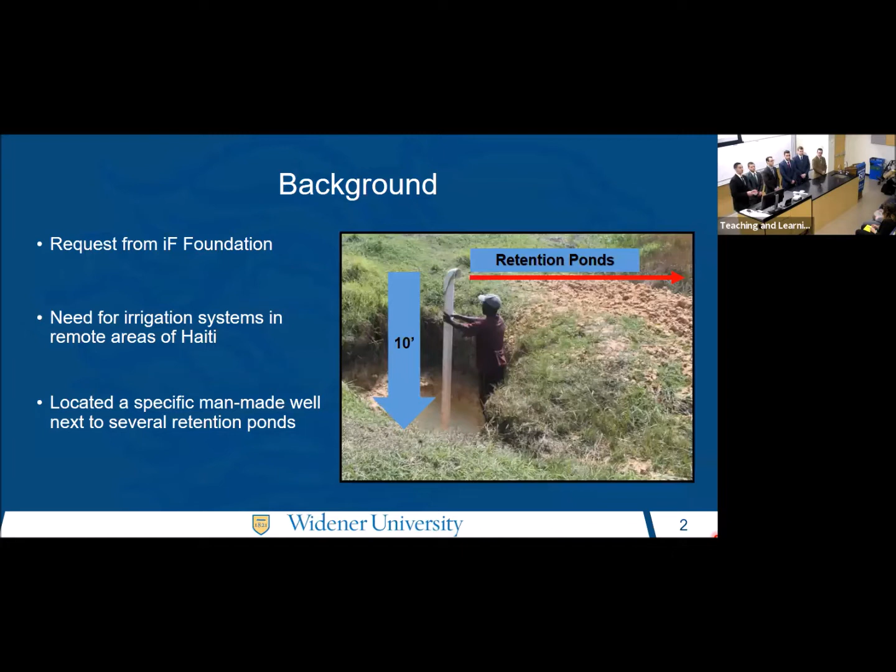They also located a specific man-made well, which can be seen in the picture to your right, where the water level is 10 feet below ground level and located next to several retention ponds. The Foundation is highly considering implementing a wind-driven pumping system to move the water from the well to these retention ponds, so it's more easily utilized by these Haiti farmers.

The main goal of our project is to perform a feasibility study of a wind-powered irrigation system with the scope of designing, manufacturing, and testing a scaled-down prototype. In doing so, there are certain design criteria involved with the full-scale design.

Our target flow rate is at least 3 gallons per minute, which is recommended to us by the Foundation. Also, a cut-in speed of less than 4.5 miles per hour. Cut-in speed just refers to the speed necessary to start spinning the blades.

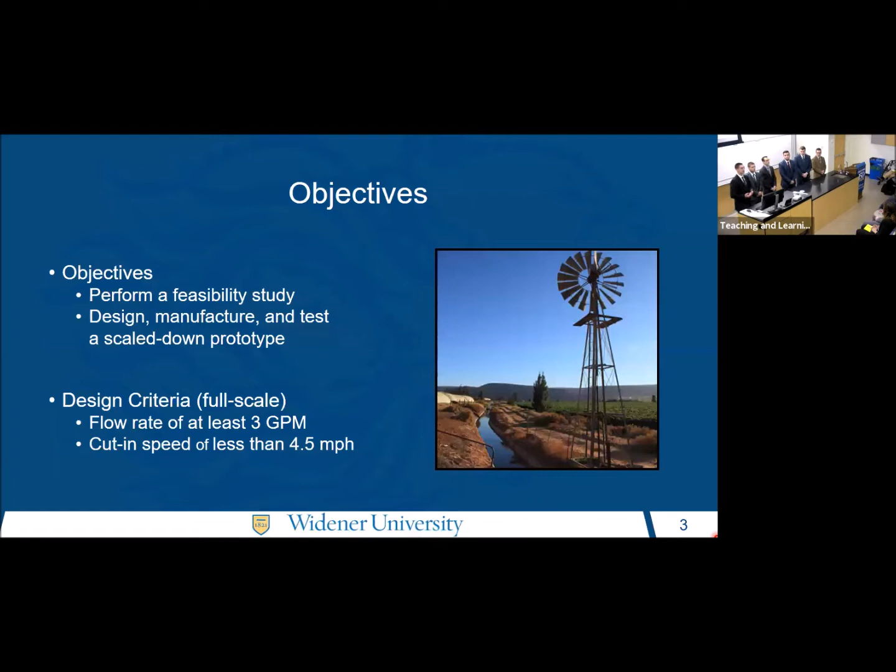There are also several design constraints involved. The main constraint being the very low wind speeds in the area of only 7 to 9 miles per hour. Another constraint includes a blade diameter not exceeding 15 feet. We also would like to keep our costs low and make it easy to manufacture so it's more affordable and easier to implement for the people in Haiti.

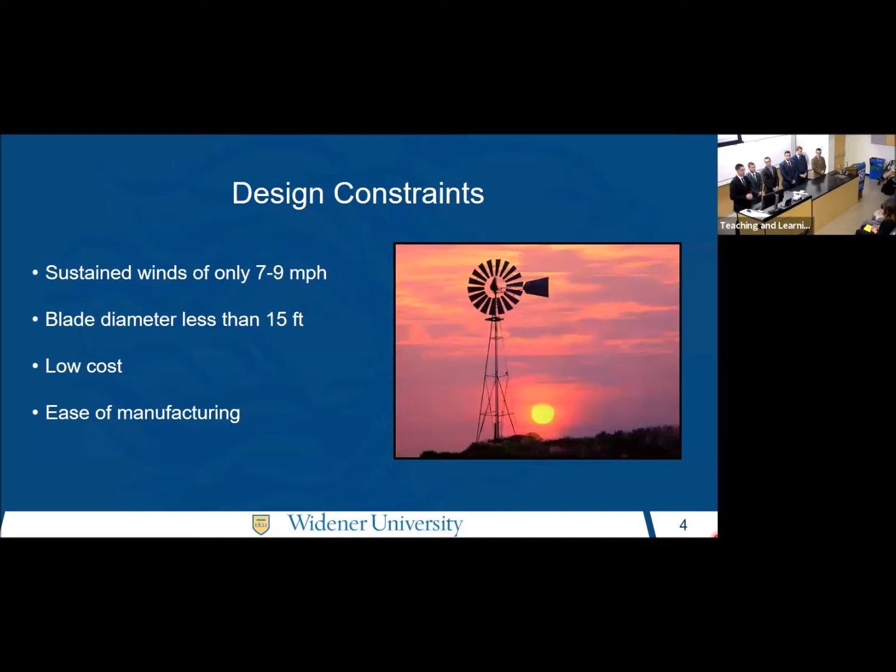Our approach in the beginning of the year was to divide this project into 4 main components that are interconnected, meaning that if a modification is made to one of these components, it will therefore affect the other components as well. The 4 components we will discuss next include the turbine blades, a pumping system, transmission system, and the foundation and structure. Next, I'll hand it over to Justin to explain the blade portion of our project.

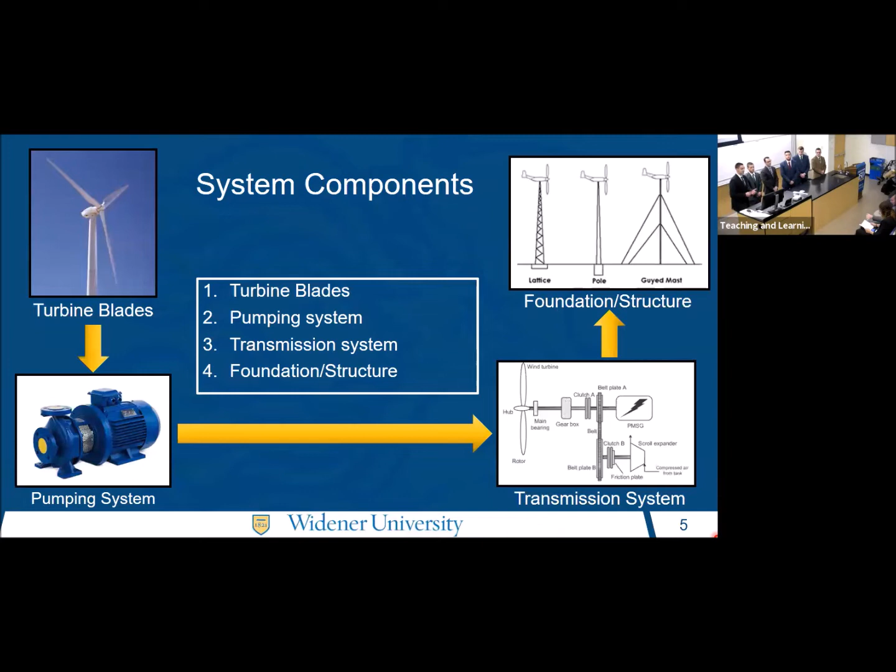Before selecting a wind turbine, it's important to know how much power is actually being produced from wind. In the top left corner here, wind power equals 1/2 times the density of the wind times the wind speed, times the area that the wind is occupying, or in this case, the area of our turbine. Notice that wind speed is cubed, so it has a dominating effect in the equation.

Because of this, it's important that we select a wind turbine that is as efficient as possible in harvesting available wind power into mechanical power. This metric is known as power coefficient, or CP for short.

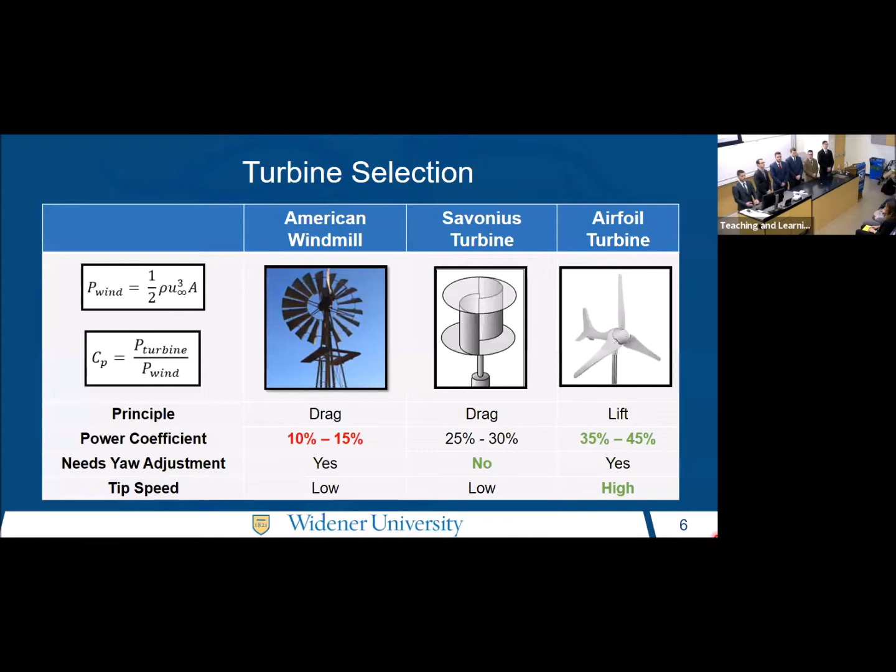The 3 wind turbine models you see here are the most common ones on the market today, with the American windmill often being used for irrigation purposes, but it has relatively low power coefficients due to drag-based design. The airfoil turbine, on the other hand, is a lift-based horizontal axis design that has relatively high power coefficient, higher than the other ones that you see. For this reason, we chose to go with the airfoil turbine.

For scaling down our model, we chose to go with a 3-to-1 scaling, and this meant that we'd be making a 5-foot diameter turbine. Dynamically, for our results to be meaningful, there are 2 non-dimensional parameters that need to remain in our full scale and our scaled down model.

First is Reynolds number, which characterizes the flow of the moving fluid. Second is tip speed ratio, which compares blade tip speed to the wind speed actually propelling the turbine. Keeping these quantities consistent, we're able to find what our required wind speed is for our prototype, as well as how fast our prototype is spinning.

We found that our prototype would need 3 times the full-scale wind speed. We found that our prototype would be operating 9 times faster than our full-scale.

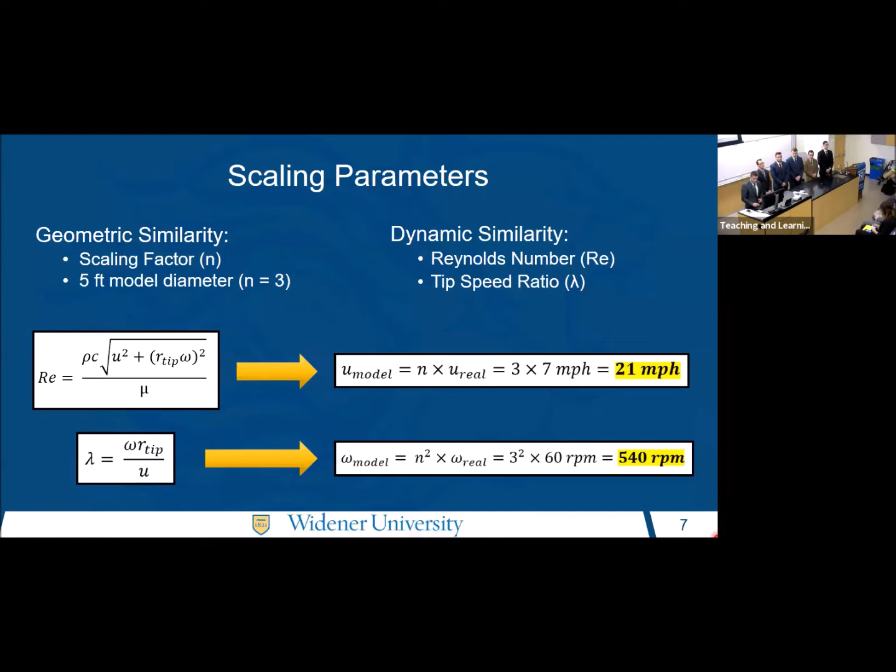For our blades, we designed and optimized our blades using iterative MATLAB code based on the blade element momentum theory. In this method, we split our blades up into 20 equal length segments, where we calculated the force on each segment using relative wind speeds and the lift and drag coefficients we were observing.

After integrating over the blade radius, we could then find things such as power coefficient, total power, and other important variables. This graph in the bottom right shows our twist angles for each blade segment along the blade that was calculated in order to ensure an optimal angle of attack of 6 degrees. It's also helpful in manufacturing the curvature of our blades.

Overall, we were able to optimize our design for our low wind speeds by selecting a NACA 0012 airfoil that has the listed parameters here.

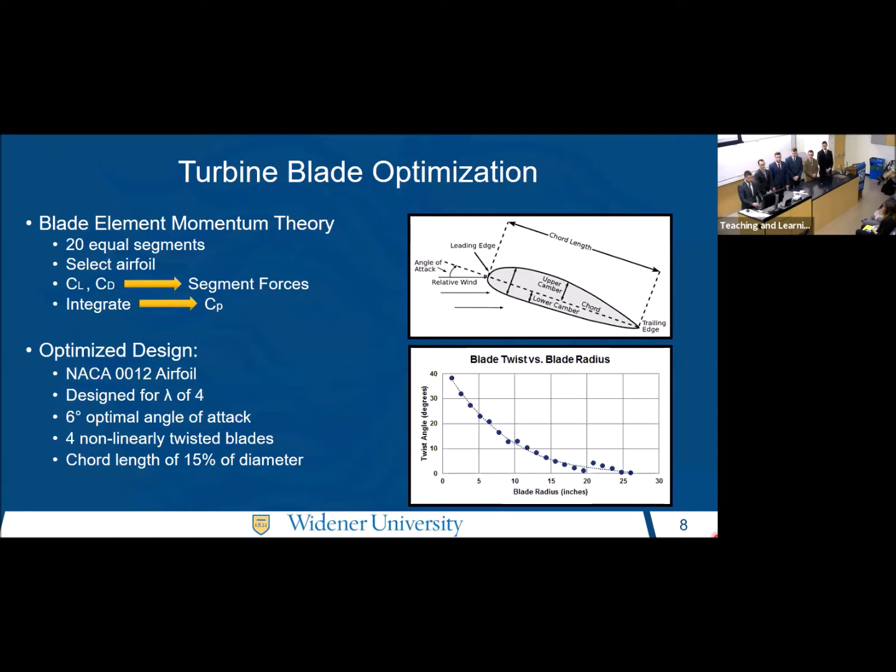For manufacturing, we 3D printed our blades in spans using PLA plastic. When making the solid model, we had a rectangular hollow cross-section that went all the way through the blades, coupled with two holes through the base of each span. This allowed us to slide each span onto a bar stock.

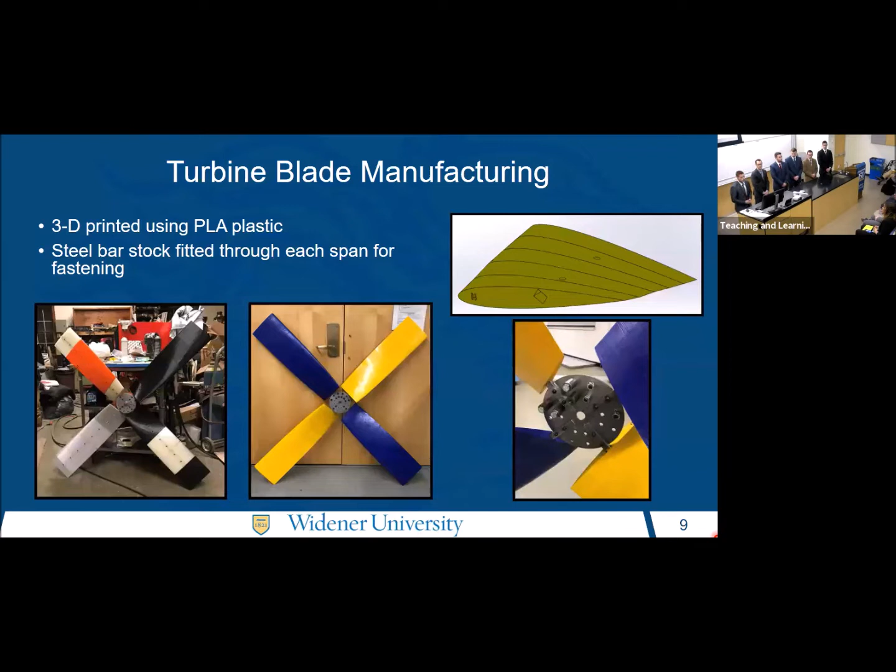Now I'll hand it off to Jesse, and he'll tell you a little about the pumping system.

Thank you, Justin. In considering design for the pumping system, there were constraints we needed to follow. First was an ease of integration between the pump and the turbine itself. We wanted something simple that runs at low shaft speeds and requires little maintenance. We needed to be able to operate with low amounts of applied startup torque, and most importantly, be cost efficient.

Looking at the Archimedes screw pump, these offer good flow and operate well at low shaft speeds, but due to its angle and size, integrating it into our system would prove difficult, and implementing it into the well in Haiti would be even harder.

Next, we looked at the progressive cavity pump. These use complex geometry to move fluid through moving chambers within the pump. They operate well at low shaft speeds and are able to overcome large amounts of head pressure, yet they are extremely expensive, with prices that can exceed $20,000.

So finally, we looked at the single acting piston pump at the bottom right. These are common for windmill applications because they can convert the rotational motion of a crankshaft into the translational motion of a piston. On the upstroke, fluid is sucked into the chamber, and on the downstroke, it is discharged. Not only are these pumps simple, but they are cost efficient.

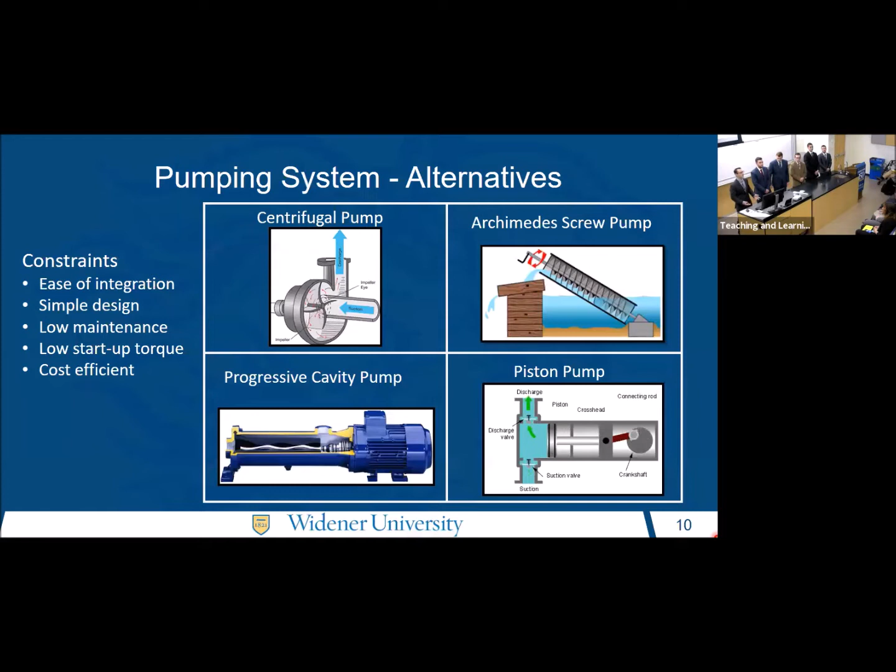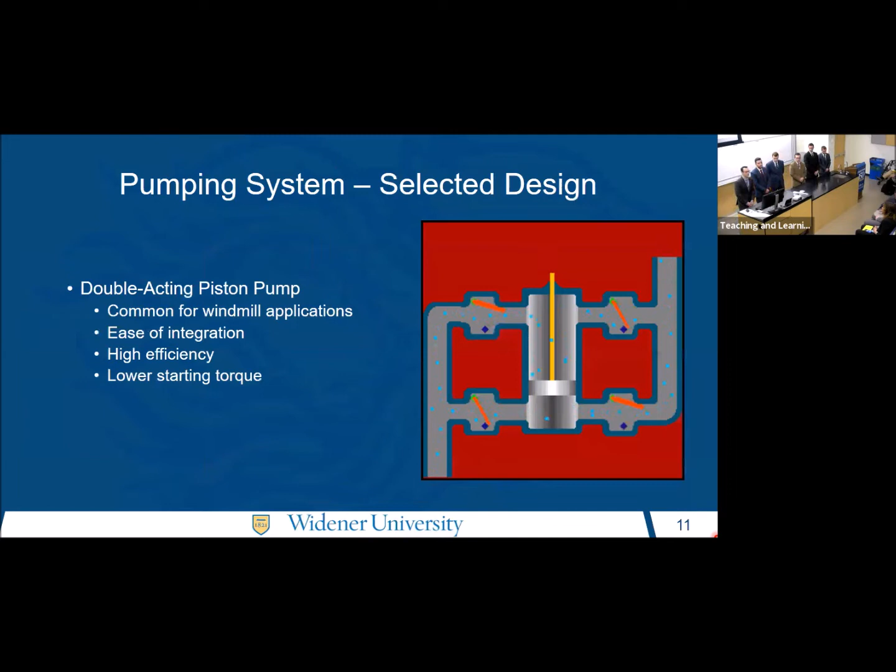We decided to go with the piston pump by making a modification to it. Instead of a single acting piston pump, we wanted to use a double acting piston pump. Same concept, except it includes 4 check valves, a suction chamber, and a discharge chamber. This discharges fluid on both the upstroke and downstroke of the piston, makes the system more efficient, and lowers the required starting torque by almost half.

The way we built this was by buying a simple hand bilge pump from Home Depot, 1.5 inch PVC, and several fittings, along with 4 check valves, and we assembled and glued all the parts together to get the pump you see on the right. Once we had our pump finished, we needed a way to integrate that to our turbine through a transmission system, which Curtis is now going to tell you about.

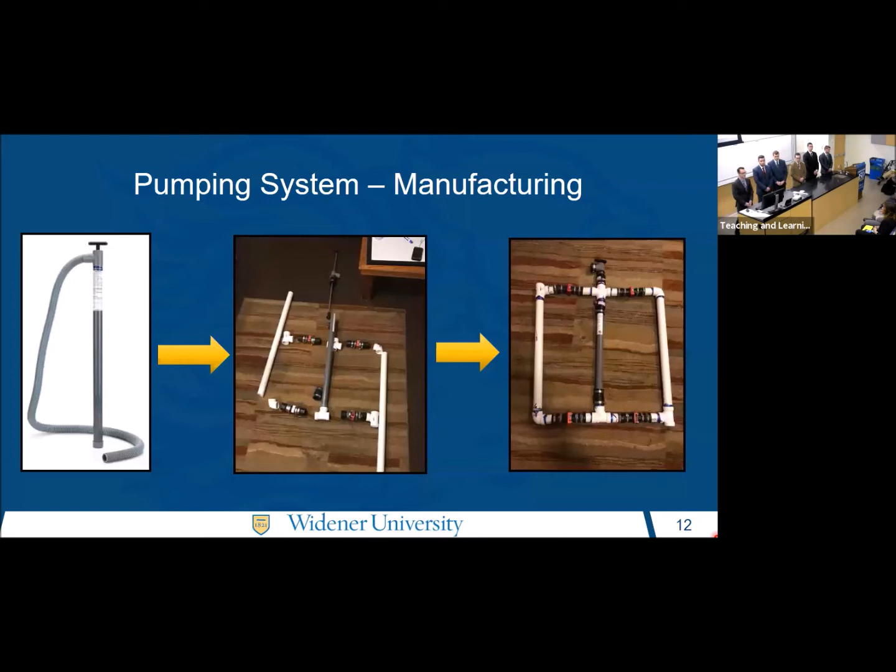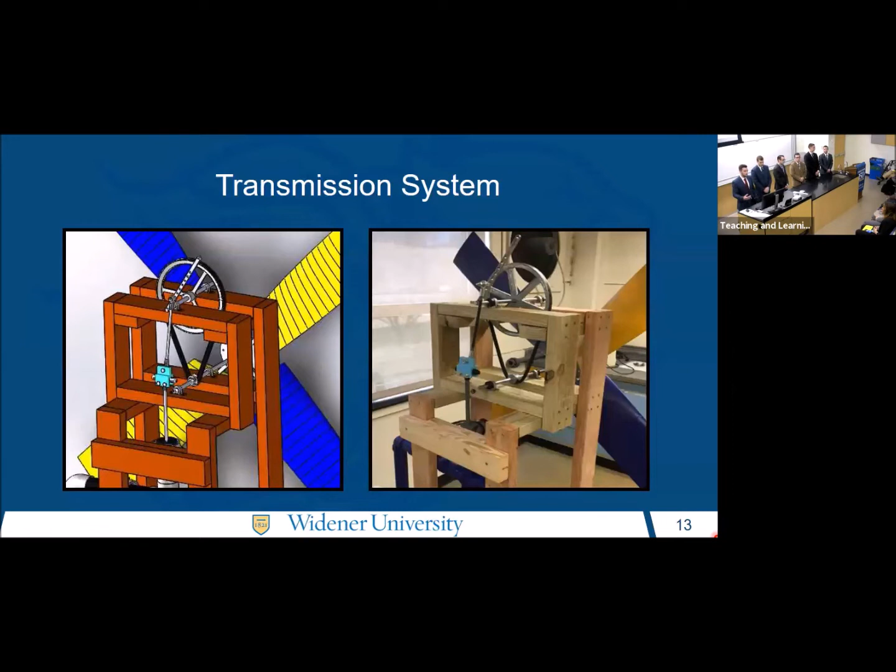Thank you, Jesse. On the left-hand side you can see our SolidWorks design. We used SolidWorks to not only design, but also analyze our system before we built the prototype, shown on your right. It's important to notice that the input of the turbine blades' rotational motion drives a pulley system and slows down the RPMs of the output reciprocating motion on our pump.

There are a few key components of our transmission system, one being our wooden frame made out of 2x4 wood. Also, we had a 4L V-belt pulley system with an 8.2 to 1 speed reduction. Here, if the blades were spinning at 600 RPMs, the output on the pump would be around 73 RPMs.

If you look at the lower left picture, here's our variable crank, which was used to test different crank lengths in the lab from 3/4 of an inch to 9 inches. Also, in the lower center is our pump connector, which connected the connecting rod to the piston rod. This was designed in SolidWorks and 3D printed out of ABS plastic. The bottom right shows one of our bearings.

For our total system, we had 4 bearings. These were low friction, permanently mounted, and self-aligning, which allowed us to reduce the vibration in the system. We also ran into an issue during testing: our piston rod buckled because it was made out of wood. To overcome this, our team got together and machined and fabricated an aluminum rod to replace the wooden rod that buckled.

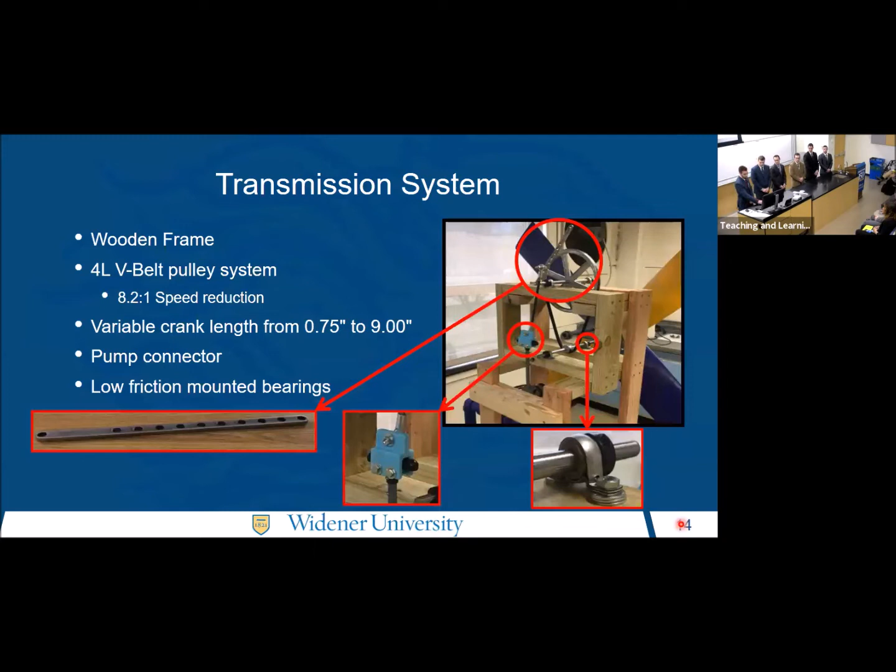Now that we're done with our design and our build, we're going to move into testing. There are two types of testing. First, I'll talk about the testing of the performance of the turbine blades alone.

And then later on, Jesse will talk about testing of the whole system. If you look at the picture on the right, you can see that we used the exit of our wind tunnel for our wind source on the project. On the right-hand side is our torque sensor, directly connected to the shaft of our turbine. In the lower picture, we used a ratchet strap to act as a brake on our torque sensor, which acted as a pre-applied load to our turbine.

To test the startup torque, we applied a full brake with a ratchet strap to the torque sensor, and we measured the torque at varying wind speeds. After that, we tested the operating power by varying the brake torque with the ratchet strap, and we also tested the torque and the RPMs at those different speeds. These methods were used to validate our analytical design.

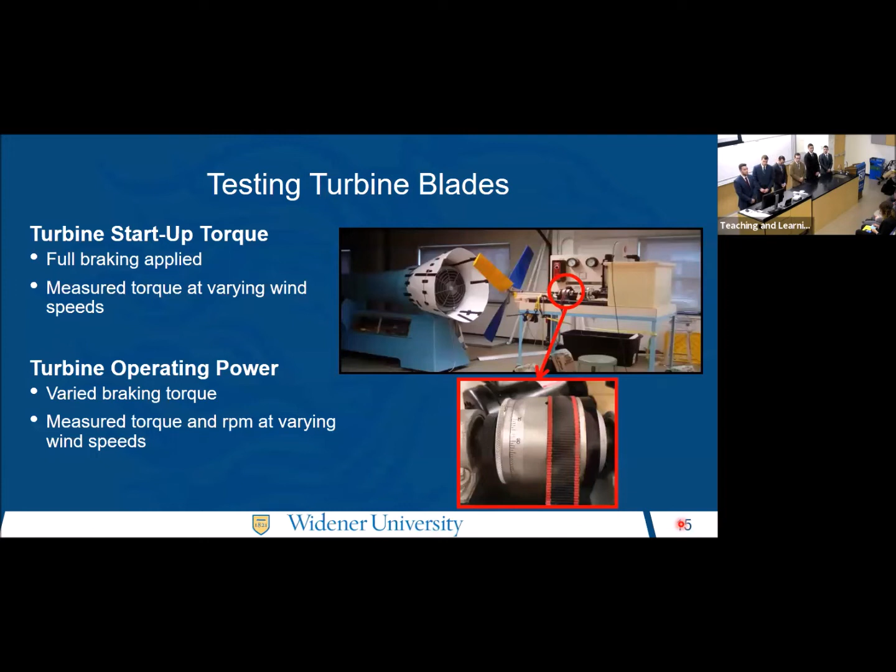Now I'm going to pass it on to John to talk more about the non-uniform wind coming out of the exit of our wind tunnel. Thank you, Curtis. So the main testing challenge we faced was non-uniform wind over our blade area. This was not ideal for testing, and it posed the challenge of what wind speed to use when analyzing our results.

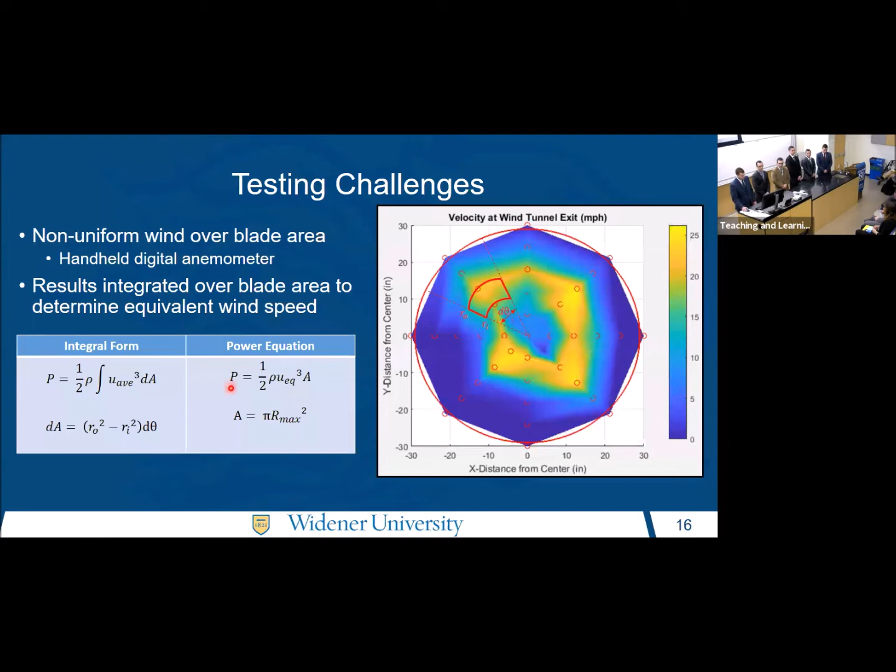What we did was create a velocity profile, seen on the right. We divided this velocity profile into 40 small sections, and for each section we calculated the wind power. By adding up the wind power for each section, we could get total wind power, and from that power we could get an equivalent wind speed. We created a graph that allows us to determine the equivalent wind speed at any wind tunnel setting, with a maximum observed testing speed of 14.2 miles per hour.

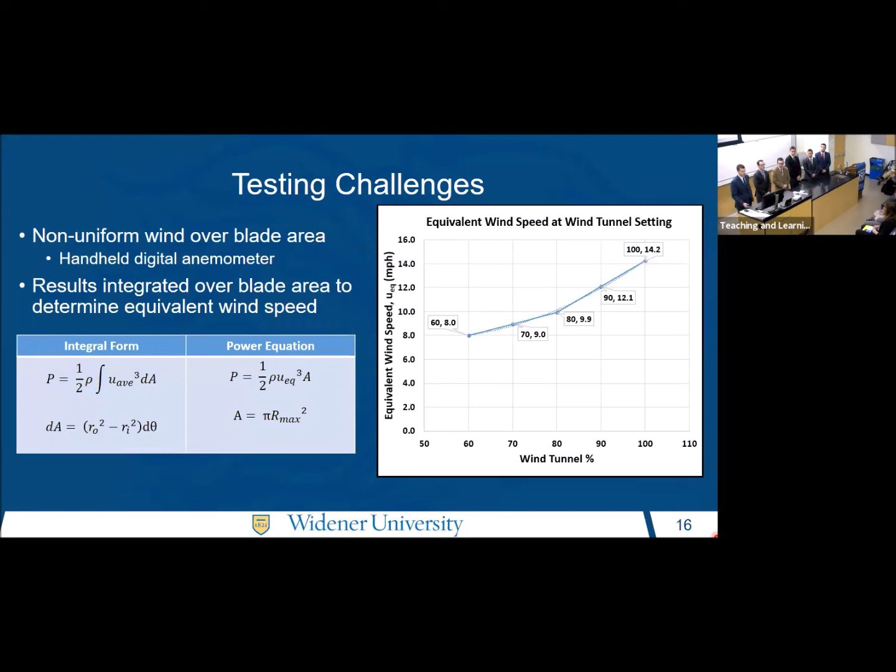So now I'm going to transition into some results, all presented in terms of equivalent wind speeds. First, we have turbine startup torque. As you can see, as wind speed increases, the startup torque also increases, with a maximum observed startup torque of 18 inch-pounds at our maximum testing speed.

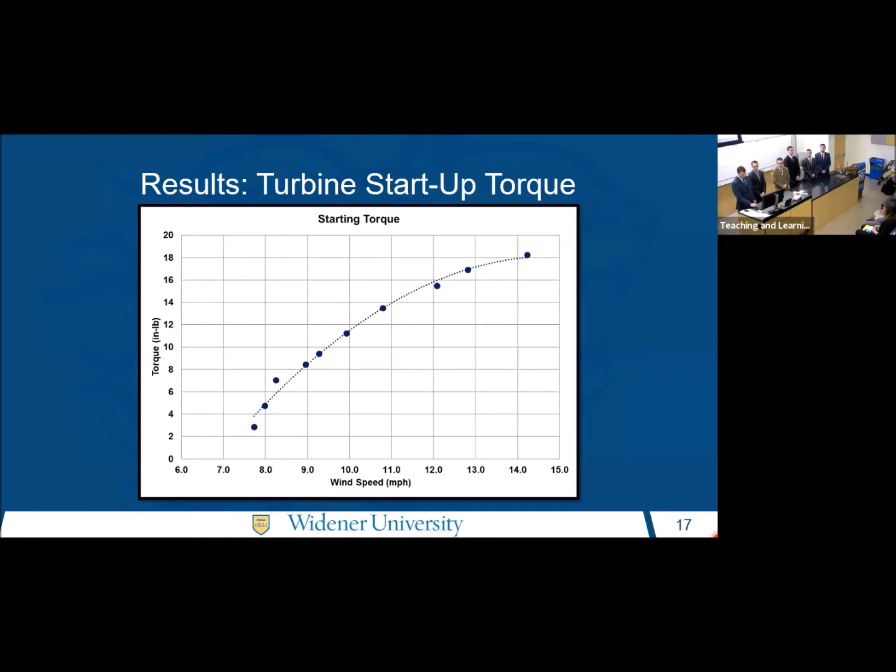For turbine operating power, on the left is our analytical results from the iterative MATLAB code, and on the right is our in-lab experimental results. As you can see, we're able to achieve a power coefficient of about 0.3. Comparing that to the analytical results of about 0.38, we fall within about 25%. So to conclude, our experimental results validate that the lift-based airfoil design was the best option, as it doubled the maximum power of the American windmill and equaled the max power of the Savonius wind turbine. With better wind uniformity, we believe we could get better power coefficients.

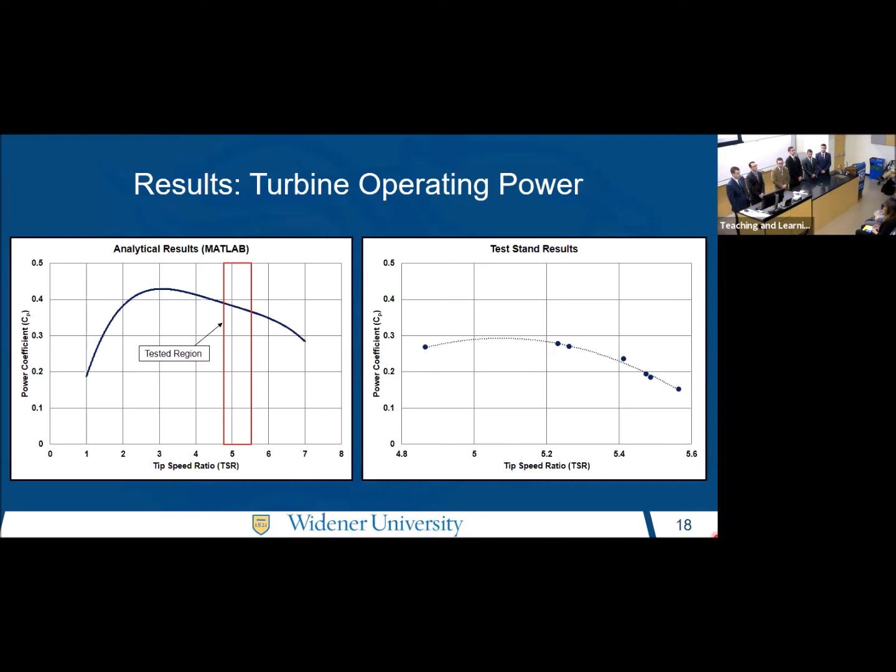I'm going to pass it over to Jesse to talk about testing with the pump. Hey, John. So we tested our full prototype assembly looking for both flow rate and overall efficiency data. We tested it inside in the lab using the exhaust of the wind tunnel, and outside on the roof of this very building. We tested 3 different crank lengths inside and 1 3-inch crank length outside.

We plumbed the suction side of the pump into a bucket of known volume, and the discharge side of the pump up through a 10-foot pipe to give us our desired head pressure. Then we divided the volume of the bucket by the amount of time it took for the pump to move that water to calculate our flow rate and our overall efficiencies.

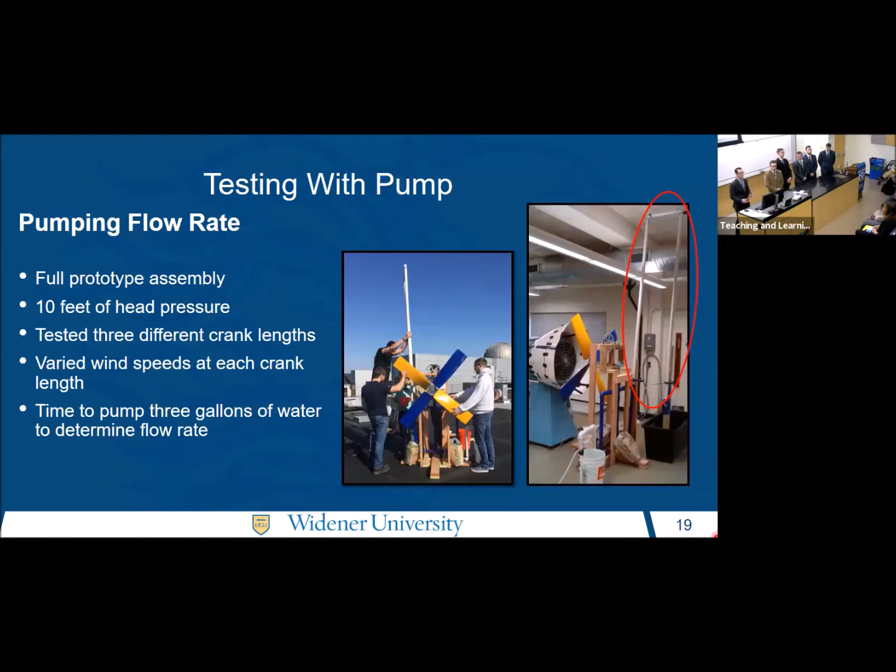Looking at the graph on the left, as our wind speed increased, our flow rate increased. Also, as we increased our crank length, our flow rate increased with it. Our largest flow rate was about 3.5 gallons per minute, using our 3-inch crank length during outdoor testing. Not only was the wind speed fastest outside, but because we weren't using the wind tunnel, it was also the most uniform. Looking at the graph on the right, as our wind speed increased, our overall efficiency decreased.

But as our crank length increased, our overall efficiency increased with it. Now we noticed while testing, as we increased the crank length, we were increasing the torque and the load on the system, yet the turbine blades remained at the same speed. This showed us that our pump was undersized for this system. The turbine was producing more power than the pump could handle, giving us the low efficiencies you see below. Ways we could rectify this include increasing the crank length even farther, increasing the transmission ratio, or increasing the diameter of the pump we use.

Next, I'm going to hand it off to Tim, who's going to go over the structure.

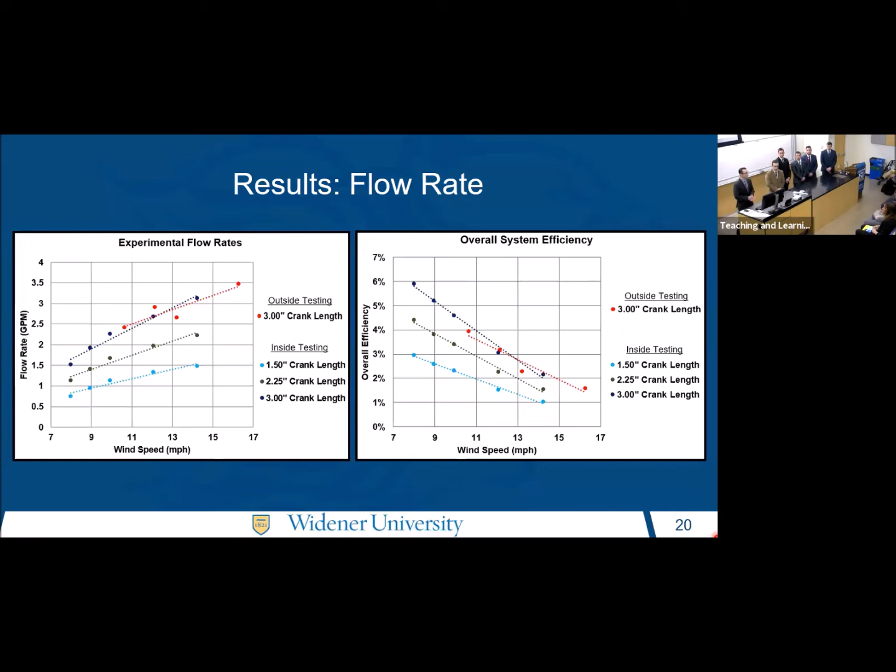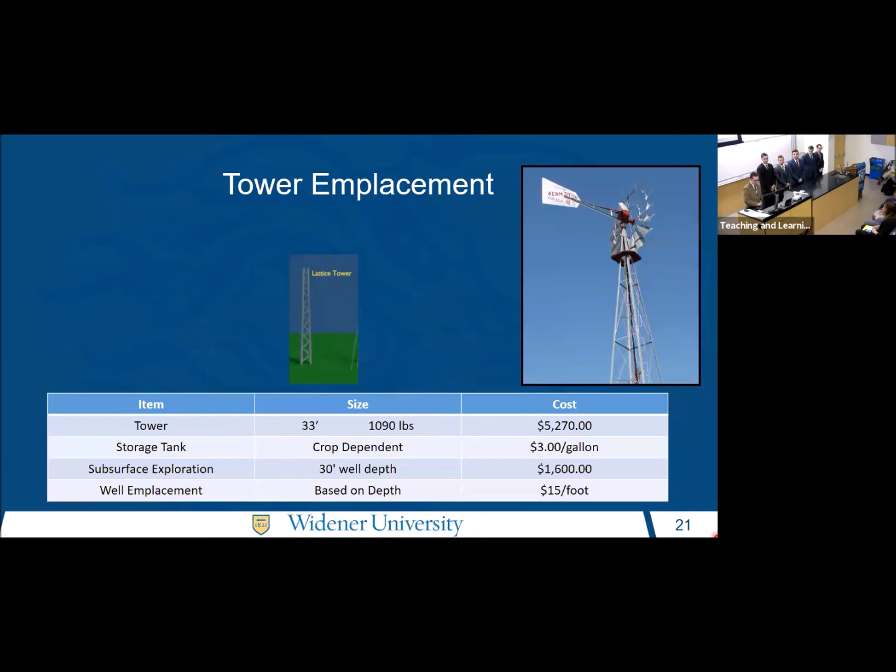Aermotor windmills will cost about $5,300. That doesn't include the cost of shipping.

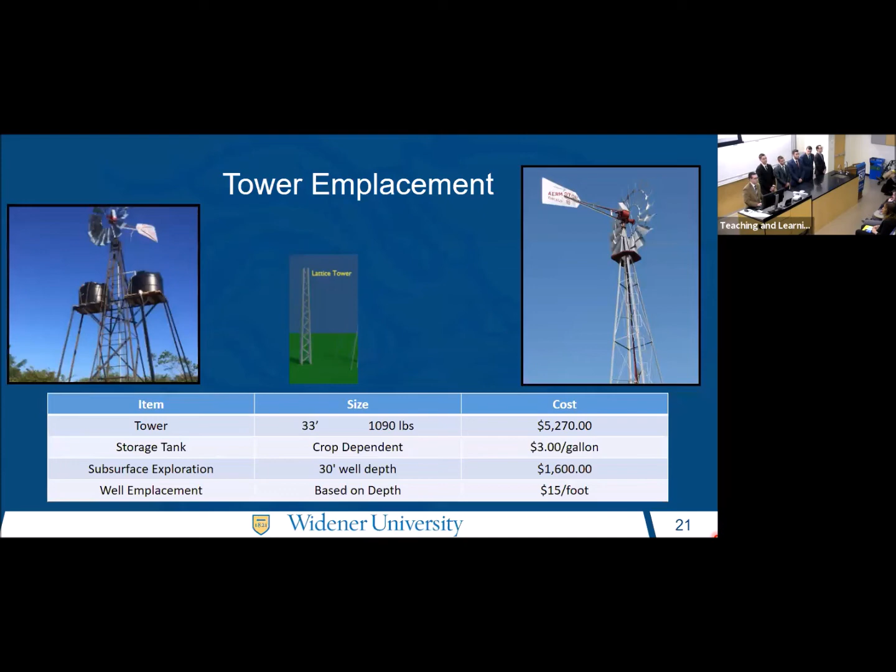Also, Haiti's, or the Foundation's, planning to use retention ponds to distribute the water. However, that's downhill from their proposed irrigation location. So we're recommending that they build storage tanks in an elevated position so they can disperse the water more easily.

Due to USDA requirements, we weren't able to take any soil samples, and for budget reasons, we couldn't go to Haiti for that. So for future testing, we're looking into possibly an outside firm that operates in the southern end of Florida and the Caribbean, so they can check our soil samples to see if they can support the structure, as well as address the foundation's request for a 30-foot well.

At this time, we don't recommend them going that deep since the water table is only about 10 feet down. But if they do want the 30-foot well, then more subsurface exploration is going to have to be done to decide if they'll hit any bedrock at that depth.

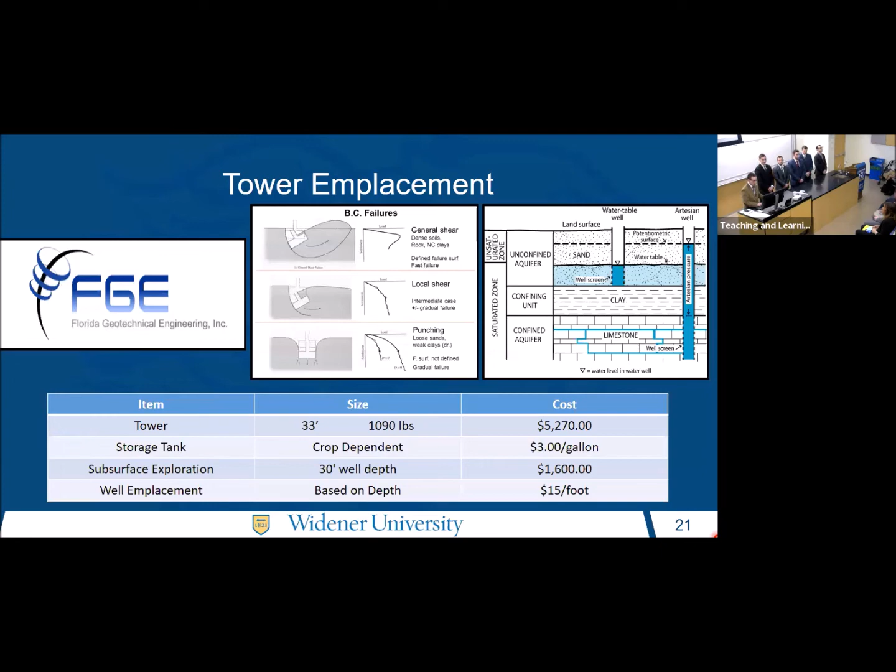I'm going to hand it off to Mike for a quick summary. Thank you, Tim. So based on our results, we were able to draw several conclusions. We were able to achieve a maximum system flow rate of 3.47 gallons per minute while testing outside, and a flow rate of 3.16 gallons per minute while testing in the lab. Both of these exceed our target flow rate of 3 gallons per minute.

We were also able to obtain a theoretical power coefficient of up to 43%, despite our wind turbine having a low Reynolds number. We demonstrated a power coefficient of up to 30% while testing in the lab, despite non-uniform wind.

We concluded that if a larger pump were incorporated into our design, that would increase the overall system efficiency as well as the flow rate. Despite our pump testing being inconclusive, we were able to estimate that with a proper pump in the system, we would exceed a flow rate of 20 gallons per minute, utilizing a 15-foot turbine receiving 9-mile-per-hour wind speeds.

Finally, we were able to determine that it is feasible to implement a similar system in Haiti, despite low overall system efficiencies and less than adequate testing wind speeds.

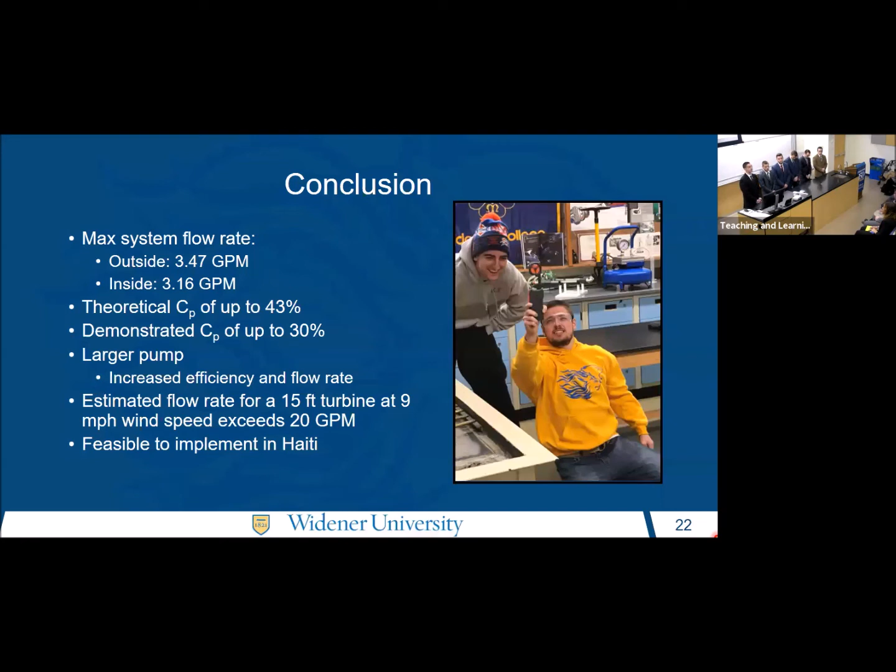Before we conclude, here's a quick video of in-lab flow rate testing.